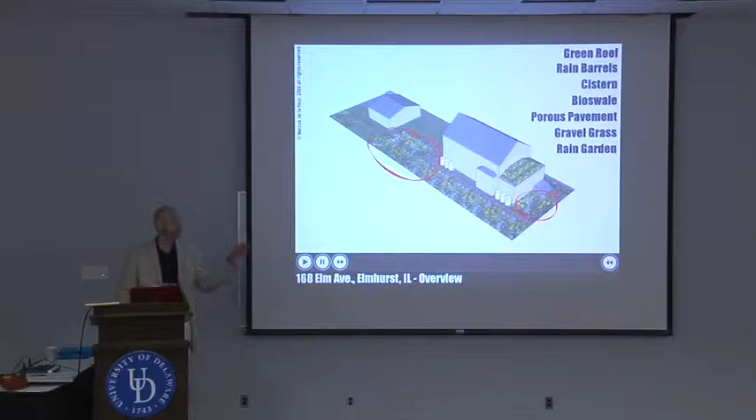So let's start that part of the presentation with the green roof.

And then utopia comes to mind - what if we could have green roofs everywhere? And again, it's really fluid, because is it really utopia? If you look around other parts of the world, you have developments and subdivisions where every square foot of roof is covered by a green roof. So where does utopia start and where does it end?

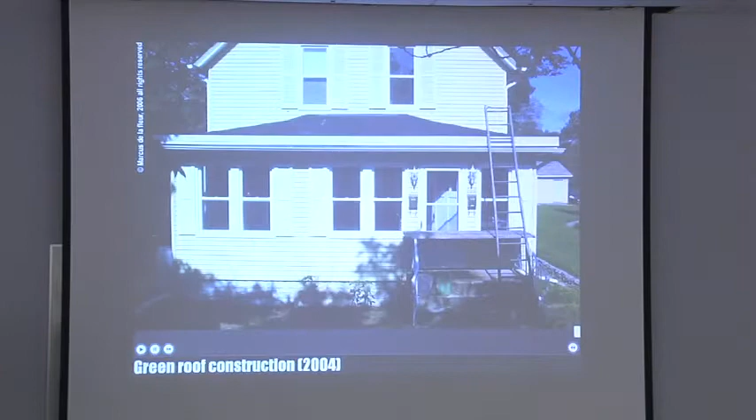In order to understand the green roof a little better, let's look into the guts by looking at the construction, how a green roof is actually put together. We've put a new roofing membrane on there, which is the black stuff, and then you see the white edge along the roof - that's a vertical aluminum edge, perforated to let the water out. Now we can start building up the green roof behind it, starting with a protection membrane. The purpose of the protection membrane is to protect the waterproofing, because the last thing we want is anything damaging the waterproofing.

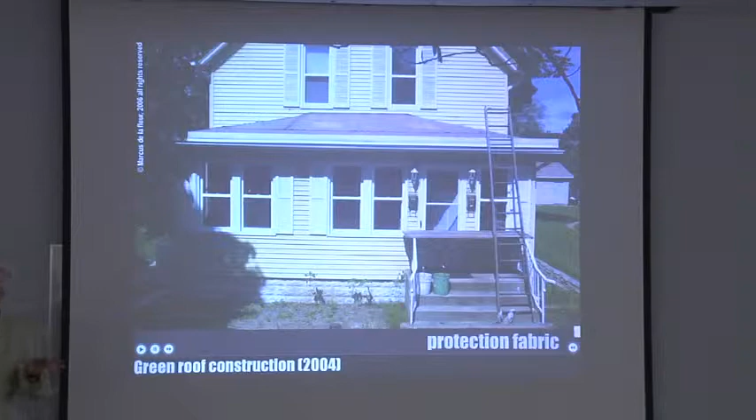Does that make sense? On the protection fabric, we put a drainage layer, which is lightweight, small aggregate, like pea gravel, but significantly lighter than that. The protection fabric really does its work because it keeps those pea gravel elements away from the waterproofing, because you want to make sure the waterproofing lasts for many, many years.

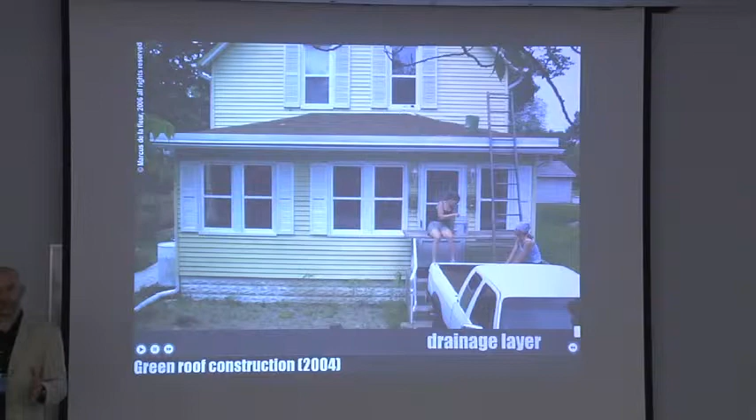The drainage layer is very important because we have to control the water level within the roof. We try to grow plants in a really extreme environment, and to do so, we need to moderate the growing conditions.

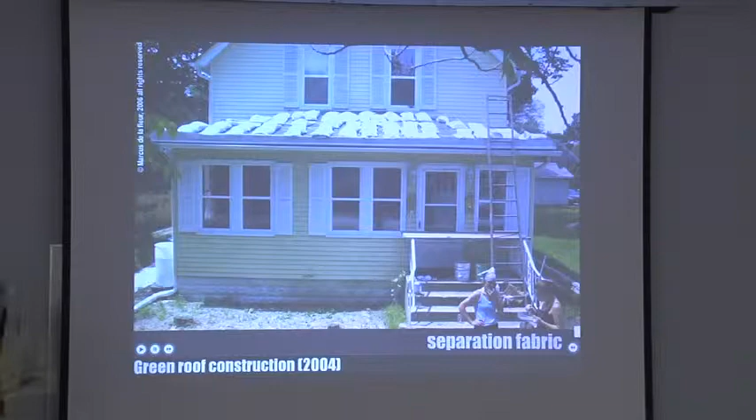So controlling the hydrology with the gravel layer becomes really important. Over the gravel layer, we put a separation fabric that's held down by these soil bags here, or soil medium bags, and then we spread the soil over. The separation fabric is very important because you have the growing medium, which is a very fine medium, and underneath it you have the drainage layer, which is a coarse medium.

The last thing you want is to have the fine medium migrate into the coarse medium, because then the coarse medium doesn't drain anymore, does it? The separation fabric takes care of that.

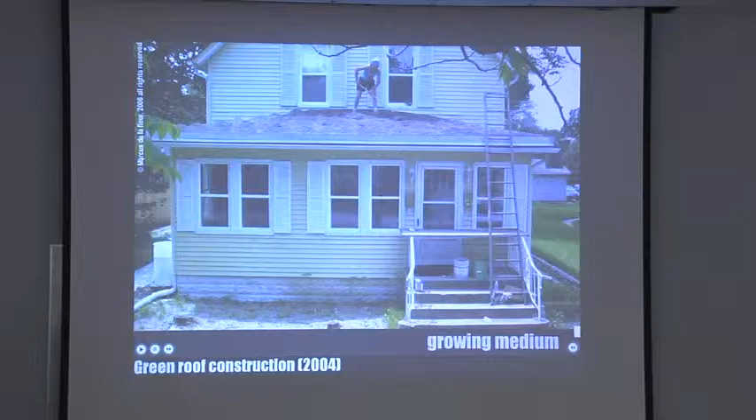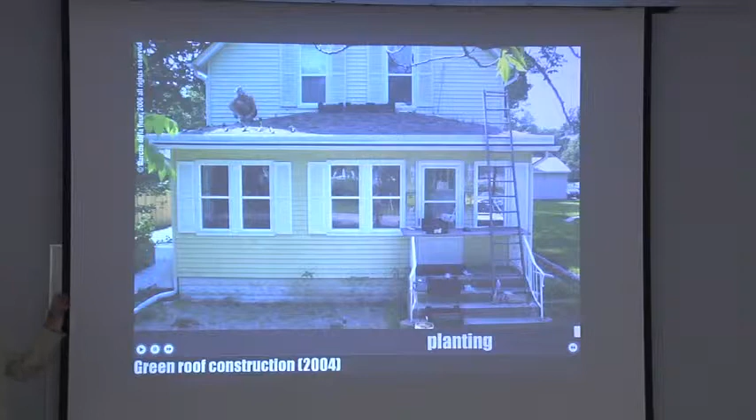We start spreading out everything very carefully to make sure that the weight is distributed evenly. And again, this is where it becomes a bit rocket science. You can't just throw dirt up there, it has to be a growing medium. This has not only to do with weight control, because this growing medium is relatively light, but it also has to do with the growing conditions, which we need to moderate.

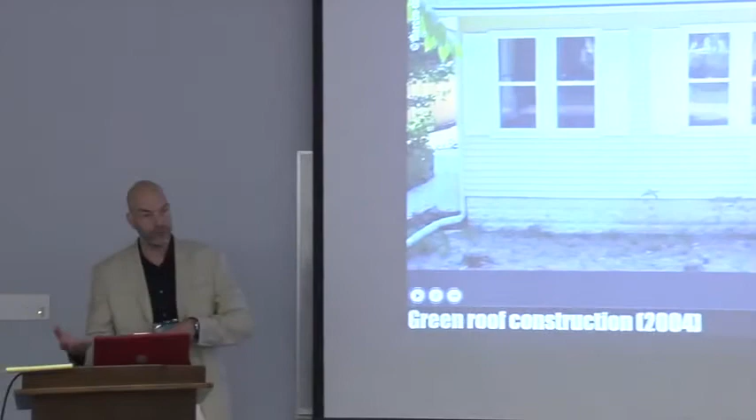So this is specifically engineered to be not too wet, not too dry, somewhere in the middle, so that you can at least have a very narrow plant palette that would survive under these conditions without irrigation.

Where do you think, in this roof, you would have the highest root density? Any guess on that one? Highest root density - you have the plants in there growing right now, you have all these different layers and materials. Where would you find the highest concentration of roots? The top? Bottom? Where on the bottom?

It's really interesting. If you start folding the thing up, the highest density of roots, ironically, is in the protection fabric, which is like a quarter-inch thick fiber mat. That's where all the roots hang out. Why? Because that's the last piece in the whole roof assembly that still will have water. That's the last thing to dry out. So that's where the roots hang out. That's a popular space.

Let's move on. There is always the other issue about green roofs, and that is, how do they look? Just recently I saw on a professional forum a discussion about failing green roofs and this and that, and I suddenly realized it's not about failing green roofs, it's about our definition of what a green roof needs to look like. Because some of the green roofs that were described as failed, they're just doing what they're supposed to do. It's just that the expectation of what the green roof looked like was very far removed from the actual reality, if you know what I mean. And then it gets labeled failed. So explaining what a green roof looks like throughout the season is sort of a utopian task.

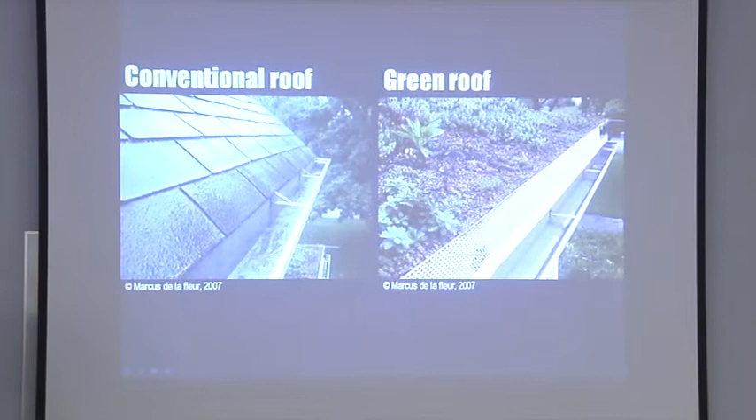There we go. All right, same rain. These two videos are taken seconds apart from each other, and on the conventional roof, you can clearly see how the water shoots off the roof, dumps into the gutter, and then flows toward the downspout.

If I move over to the green roof, if you look really hard, you see raindrops falling into the gutter. But right now, there's nothing draining from the green roof yet into the gutter, because the green roof can still absorb some of this rain and holds it like a sponge.

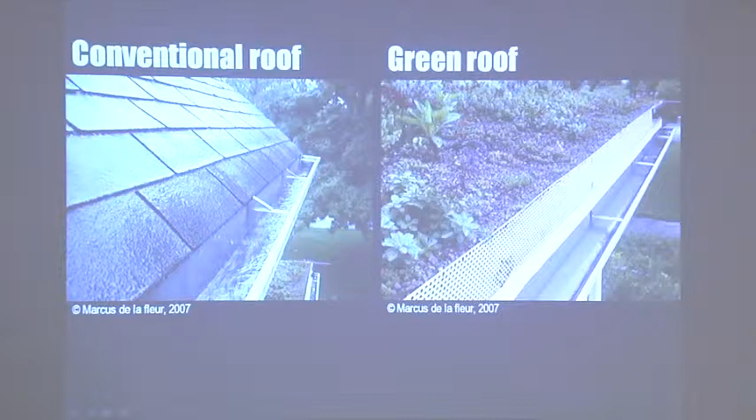Does that make sense? Okay, if you move now down from the gutter to the downspouts, this is the conventional roof, and compare that to the green roof.

Okay, oh, it's running. I thought it wasn't running. Let me start this again.

Hopefully this piece of anecdotal evidence somehow demonstrates what the stormwater management capacity of a very simple green roof can be. And again, no cheating going on here: the same contributing area, same rainstorm, just seconds apart from each other.

So we have a demonstration here on the usefulness of the green roofs and how they work, but we also have a demonstration on what's happening with our conventional roofs, where we have a lot of rainwater coming off. So the question is, what are we going to do with that water? Does it need to go to waste, or can we do something useful with it, or maybe even make it beautiful? The answer is yes, which brings me to the next topic.

I have problems with my flash application here, which are the rain barrels on the south side of the house. So let's take a closer look at those. Excuse my technical difficulties here.

There we go. At the time, this was 2004, we didn't buy rain barrels - for many reasons, we couldn't afford them. At that time, rain barrels were still hugely expensive. The other thing, when I did some research, is that the plumbing provided on the rain barrels didn't make any sense whatsoever, and I'll come to that a little later. So my friend and landlord, Ben, got these soap barrels from the car wash. We rinsed them out, and we started constructing our own rain barrels, a set of 3 pairs.

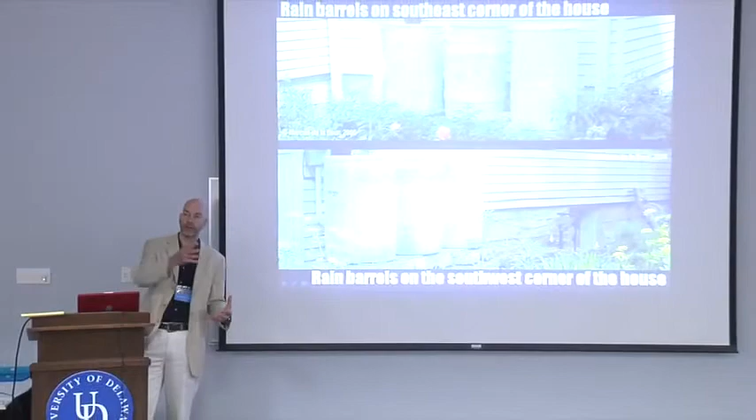I want to look at the upper one a little closer to talk about the rain barrel plumbing and what you have to think about, because rain barrels are sort of the epitome of what can go wrong. People think rain barrels are so sexy, so simple, that they want to put them up, and 3 weeks to 3 months later, they disappear. Because where previously, without the rain barrel, everything was working fine, now with the rain barrel, suddenly things are flooding because we haven't thought things through.

So I'm going to walk you through this a little bit, if I can get this thing to work. Let's see. Okay, first question is, if you have 3 rain barrels, where do you connect them to each other?

There we go. You connect them to each other at the very bottom, not halfway up the middle or on the top - you connect them at the very bottom. Why do you do that? Because you have 3 containers now, but you have 1 storage volume, because if it rains, the rain barrels fill up all at the same time, since they're all connected at the bottom. Does that make sense? This is very important, particularly if you get the rain barrel in one end and need to take the water out the other end.

Next thing is that you must have an overflow, a controlled overflow from the rain barrel. I have a large spigot 2/3 up - once the water reaches there, it overflows into a little paved channel that takes the water around the house into the front rain garden. This is what a lot of people overlook: either the overflow, or if they have one, where does the water go? If you don't address that, then you get flooding - you suddenly have water in your basement where you previously hadn't.

So you have to think those things through. The next thing, or actually a step before that, is you need to think about proportions. It makes no sense to have a big roof and one rain barrel—it rains for 15 seconds and the thing is full. It doesn't make sense to have a small tool shed and six rain barrels, you're going to wait all year for them to fill up. Does that make sense? So think about the proportion.

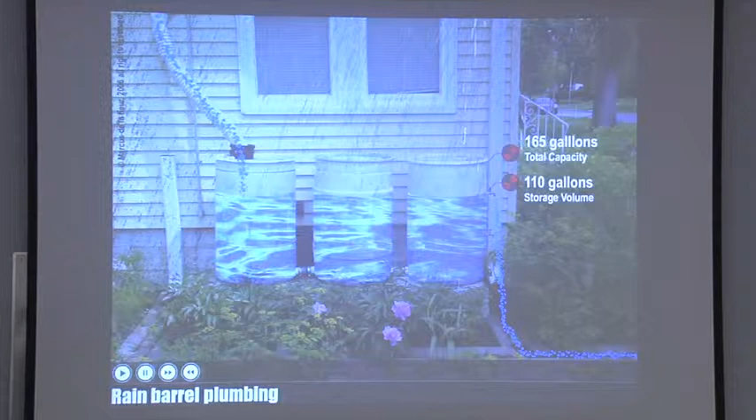Okay, the overflow—once it stops raining, you have that water stored. You can either use it to irrigate your vegetables, or if you have no use for it, then a day or two later you basically let it drain by opening the bottom spigot. It goes around into the front rain garden if we don't have any irrigation needs, which on this project we don't really have because of native plants—I'll come to that one later. And sometimes we had some use for the vegetable garden.

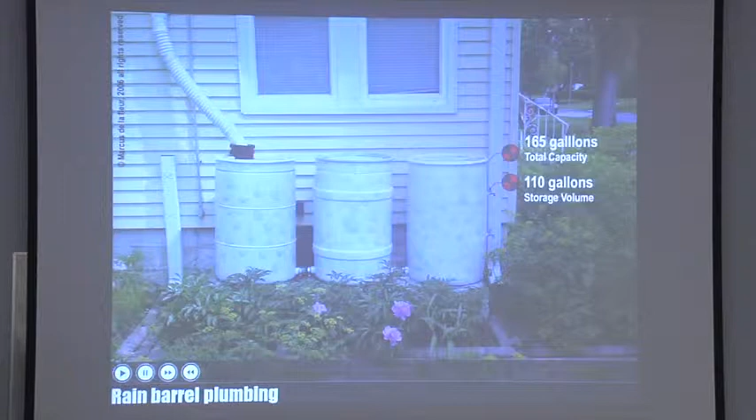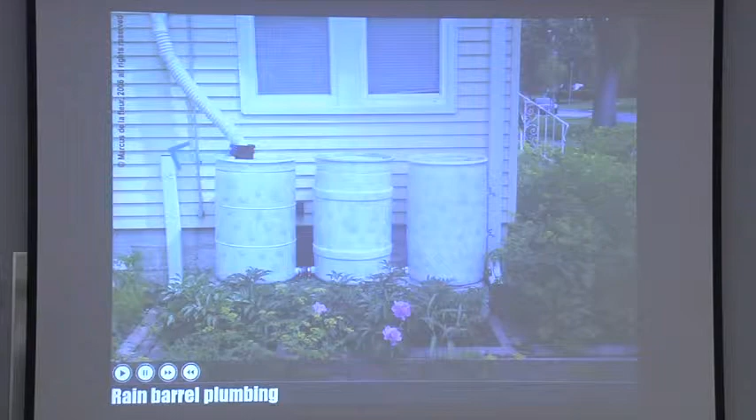And then we are in freezing climates—that includes Delaware here, we are not in the southeast or southwest. So what do you do with rain barrels in the wintertime? There's always a big question. The answer is you leave the bottom spigot open so there's no water in them at all. Then we have this flexible piece that we move over to the rigid piece. So in wintertime, all the water bypasses the rain barrels, comes out the bottom into a paved channel, flows again around the rain barrels into the front rain garden in a controlled way, not haphazard.

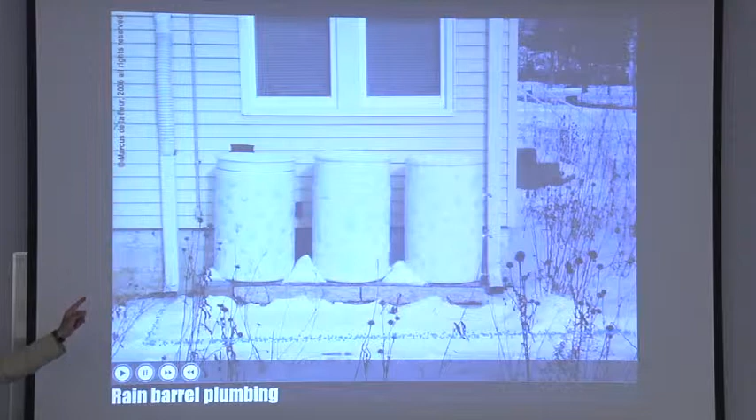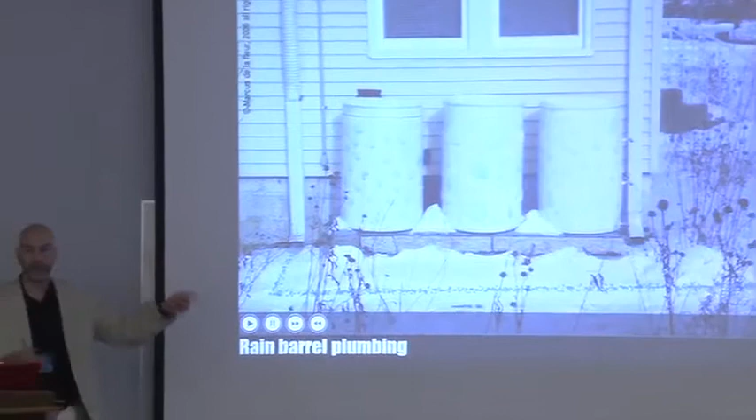Does that make sense? Now I finally figured out, if you look at these rain barrels you buy, you hardly ever can open the bottom spigot and let them all drain out. Why? Because there is no bottom spigot—it's always somewhere up, usually a third of the way. And then finally it occurred to me why that is.

So you can put your watering can or watering bucket underneath it. Now there's a very simple solution to that too: just put your rain barrels on a little pedestal, and then you can have the spigot at the very bottom. You can get the water into the bucket or rain barrel. Does that make sense? So something just about thinking these things through.

Okay, next subject: we talked about the green roof. Precipitation hits the roof first, so we thought through what we're going to do in the front, and the south-facing roof, which goes into the rain barrels. Now the north-facing roof—what we're doing here is we take all that runoff and channel it into an underground cistern, where again we harvest it and store it for later reuse, if we only had something to use it for in this particular case.

Sometimes I just gave it to my neighbors when they were ready to water their lawn. I said, I have water in my cistern, do you want to use it? Here is the cistern—it's sort of hard to see because everything is underground, so hopefully this little photo montage explains what's going on.

There's a 1,200-gallon storage tank underground, the lid on top. The beauty of the cistern is that it provides year-round storage—it takes advantage of the wet season in fall and winter and spring, because this thing doesn't freeze up, it has a thermal mass around it, which is Mother Earth. You can store most of the water from fall, winter, and spring in there, and have it ready for use during the hot summer months. Does that make sense? With the rain barrels, you solve at a much shorter time cycle—the cistern, you really can think seasonal.

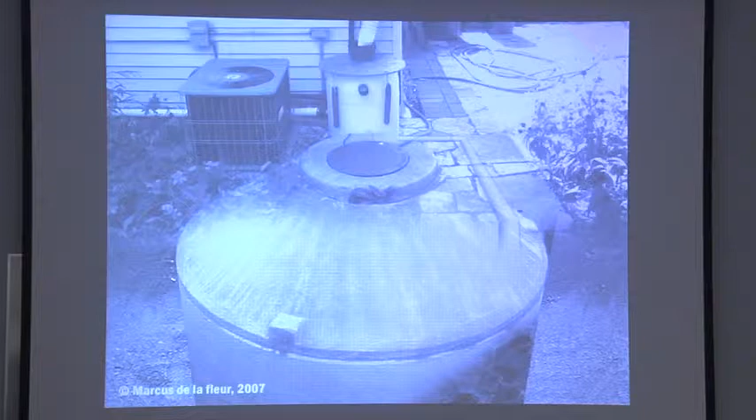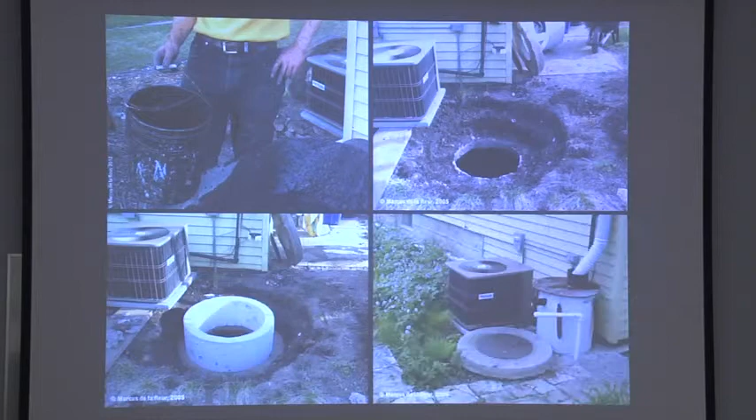Now, in our case, we had to do quite a bit of repair work to get the thing done. We first had to clean all the muck out, because it had been sitting there doing nothing for 70 years or so, put a new riser on, and then we were ready to go and happy to go.

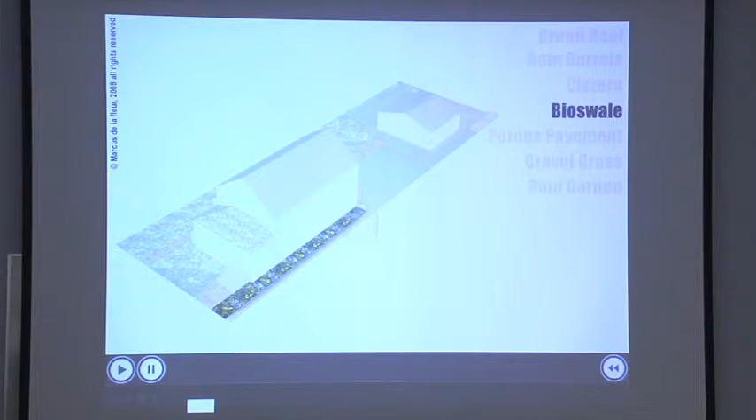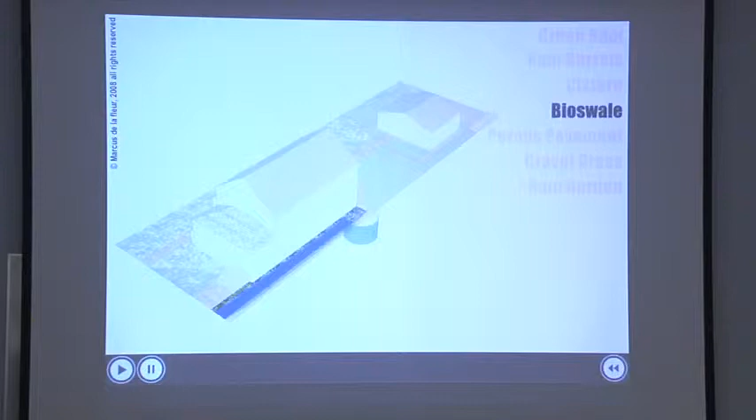Moving on from the cistern—oh yes, everything needs an overflow. We talked about the overflow with the rain barrels. What happens if the cistern is full? It needs an overflow too, and the overflow of the cistern goes into the adjacent bioswale, and that's the thing I want to talk about next.

Let's see if we can move on. There we go.

It's a large garden spigot, and yes, you do want to have a diameter that matches what comes in to what comes out, because that spigot was 2/3 up. I had what I called 1/3 bounce volume, so that allowed, if the water came in faster than it went out, it could use that extra storage volume, and it sort of largely worked out. But the preference would be, in general, the size coming in should be the overflow size going out. You're correct, thanks for pointing that out.

This is the north side of the house. This is about the property line, so we had 7 feet there. We had to think this through a little bit, because you want to be very careful about introducing water this close to the house. This is an old house with an old basement. And don't get me wrong, I like swimming pools, but I like them on my own terms.

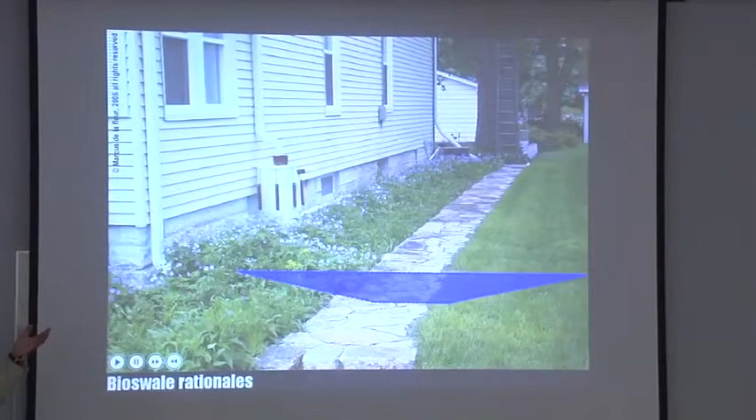So we thought this very carefully through. Let me use this diagram to walk you through that. If you take a cross-section of a typical swale, it didn't work out, because there's a property line, we didn't have that room. The idea came, what about if we clip, say, 2/3 of the swale off? We end up with this, which is good because now we are within the property line, and also the low point is the point farthest away from the foundation, if that makes any sense. So if I cut...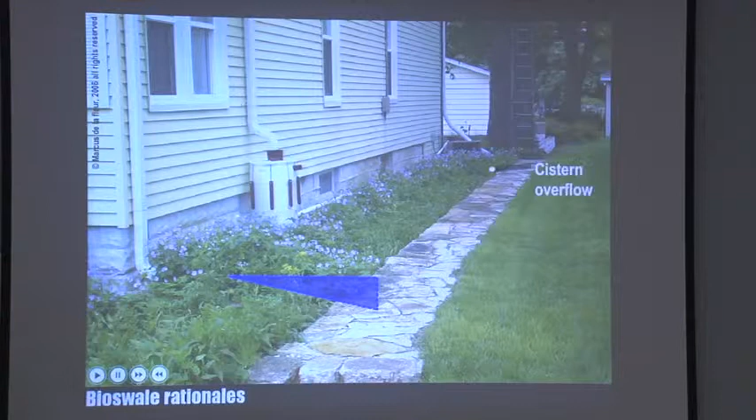Everything away, if it starts raining and the cistern is full and starts overflowing, the bioswale can fill up to what we call a high water level. The water can't get any higher than this, because there would be an overflow out of the bioswale at this end. The whole point is that I give the water residence time so it can infiltrate into the ground, because usually the ground is the bottleneck. What happens in many instances is the water comes out of the sky faster than it actually can go into the ground. By giving it residence time, I can make up for that deficiency and make sure all the water that falls out of the sky can infiltrate into the ground.

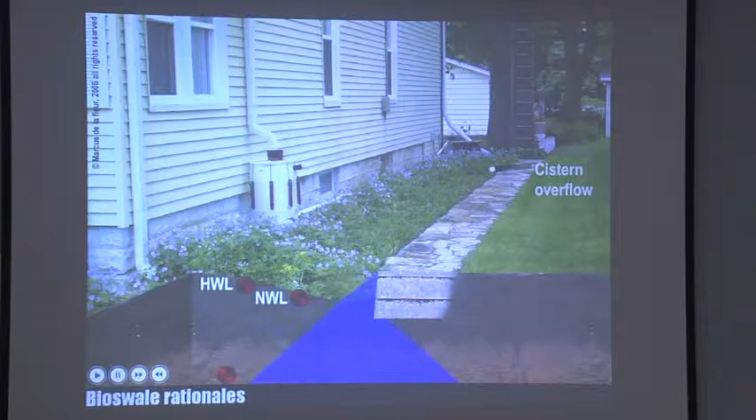It does its job, then I have normal water level. What usually happens in most rains is that I barely get any water in at all, because there's capacity in the cistern or it didn't rain that much. So high water level we actually never saw. Normal water level possibly neither, but it's hard to tell because the vegetation is hiding it. This is what typically is happening, and so it kept us safe with the basement and avoided an unintentional swimming pool. It has worked fine in this case, but I would caution everybody to be very careful about introducing water this close to the house.

Let me see what's next.

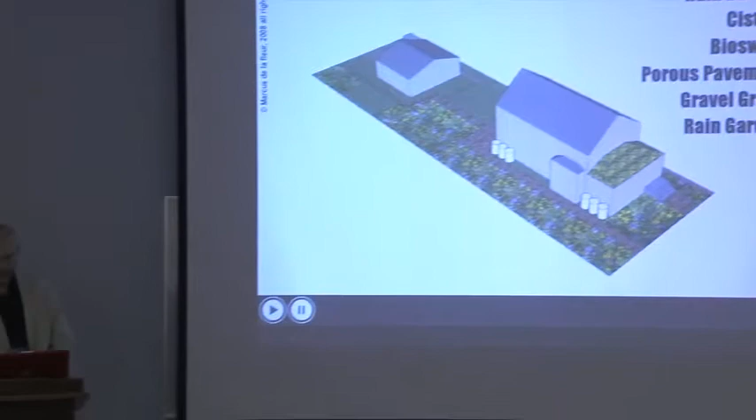Porous pavement, let's look at that part. Now, before there's porous pavement, there's the subject of dealing with the old pavement, which was your typical concrete. So we took that all up, and we sort of had an unwritten zero waste policy on this whole project. Rather than throwing all that old concrete walk into the truck and bringing it to the dump, the question is, what are we going to do with that? The small pieces we use in the aggregate base for the porous pavement.

And then the large pieces, do you recognize where they went? We were actually able, by breaking the concrete walk up into relatively regular pieces, to reuse those pieces entirely. In Chicago, we have the term called urbanite, not limestone, but urbanite. So we use those as you would use limestone to create little retaining walls and curbs and stuff like that. It's one of those interesting dilemmas: if you try to be more responsible with waste management and more innovative about reusing and recycling, but then you have projects under contract, how can we reconcile this innovative use with the rigidity of the contracting world?

This can work in a design-build environment where you rip something out in one project and think, oh, I have this other project, I can reuse it there. But if, let's say, Newark puts out something to bid, how do you want to bid this? Because where do you know that you get this stuff from? How do you know about the availability? I would like to think that one day we can solve this challenge, but right now it's really hard to get into the innovative salvaging and reuse on contract work.

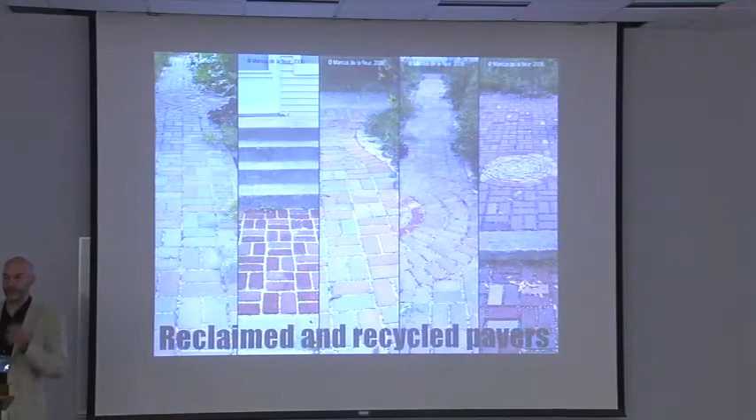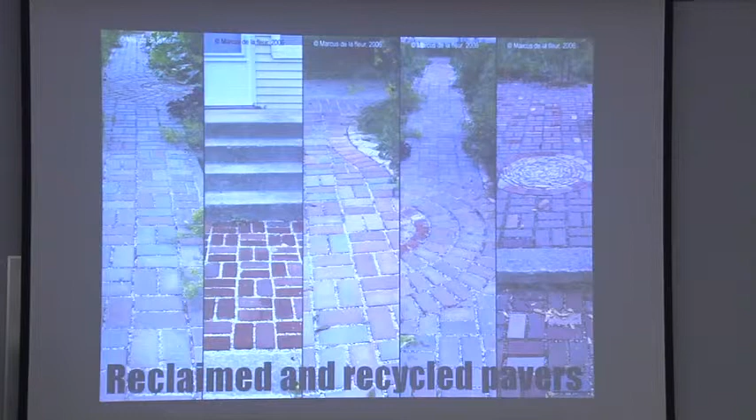Or you can do what we did, basically creating our own porous pavement system by salvaging and reusing used pavers, basically brick pavers and Holland stone pavers, to build our own porous pavement system out of them. Because we wanted a shoestring budget, we couldn't buy any of the pavers. We were just going around and collecting them from people that had some left over or were ripping the driveway out. And we said, yeah, we gladly take that, thank you.

How does porous pavement work? We surely know how our regular pavement works, which drains very poorly in most cases. But if you look over to the porous pavement, you'll be hard-pressed to find any ponding water at all. It basically infiltrates right into the system. To understand what's going on there, we are best off looking at the system.

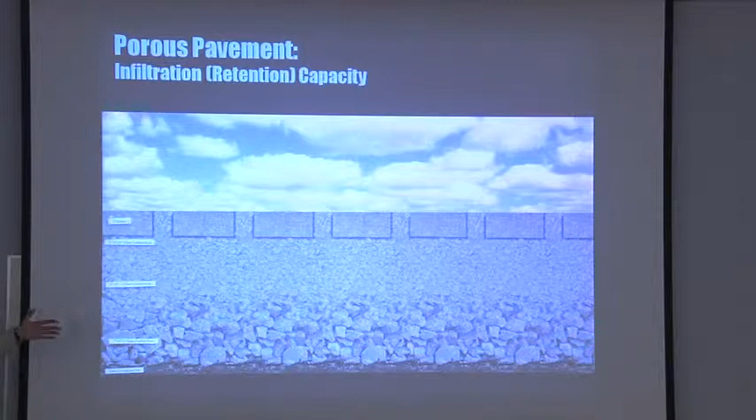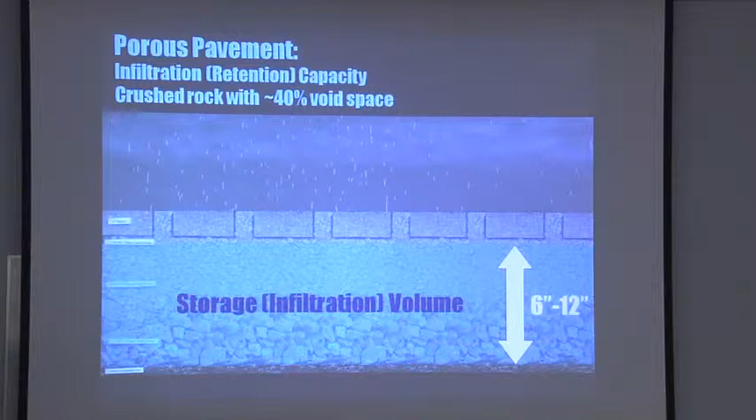The key is that we have the base composed of crushed aggregate, which is open-graded aggregate. So you have no fines in here, and you end up with a porosity between the stone of up to 40%. That's what starts holding the water, and that's also what allows the rain, when it falls onto the pavement, to fall right through and into it. Then it fills up the voids, and that's where we get the water storage. This is very important because we have the soil that is the bottleneck, and the water may come out of the sky faster than it can infiltrate into the ground.

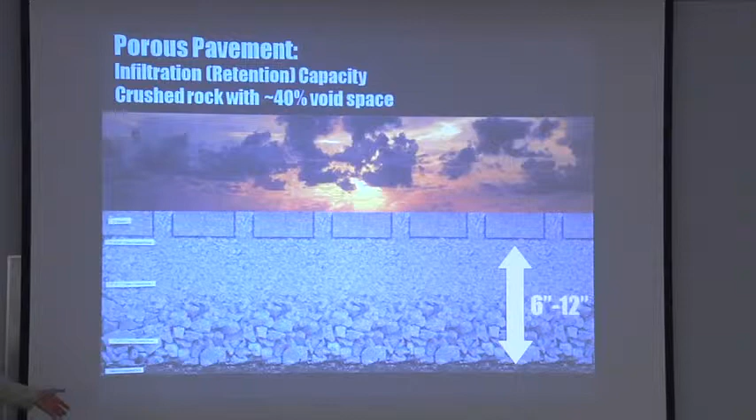So by giving it residence time here, the porous pavement does what it's supposed to do. It's slowly infiltrating it back into the ground without getting any runoff at all, unless you have a really bad rain event. Does that make sense? It's about giving the water, the runoff, residence time in the system to let it slowly infiltrate into the ground.

So it's a refreshing season if I look at this in June. There's always a question about what do you do with porous pavement when it snows. For some reason, porous pavement must be very different than any other pavement, and I get a lot of people completely hung up about how they use porous pavement in the winter. I don't know if winter is such a big deal in Delaware, but in the Midwest it always is a really big deal.

So what do you do when it snows? Have you seen my presentation before? Then you have good common sense. Indeed, you do shovel it. I have this video in there because people don't believe me. For some reason people have the opinion you can't clear snow off porous pavement. You can do it, fine.

Okay, that gives us the next thing. And I get the question, what about the ice? It may melt faster because you have more material that's holding more.

Well, you actually go even a step beyond that. In order to have ice, you need to have standing water, right? So this, at the time, was on my walk to the office, from the pilot project to the office, and it got warm overnight. Then the next day it is freezing again, and you can ice skate to work. I call it my ice ballet.

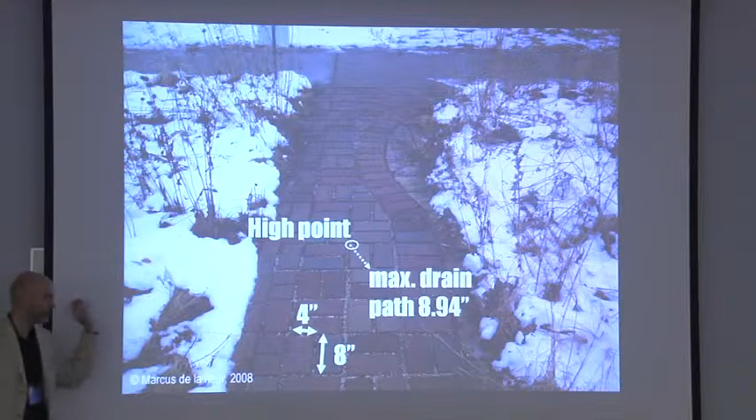Disclaimer here, if you have a downspout that discharges onto the porous pavement, you will get ice, because now you have such a big volume that you get ice built up. So it's not like it never will have ice, but under normal conditions, you will not have ice on porous pavement.

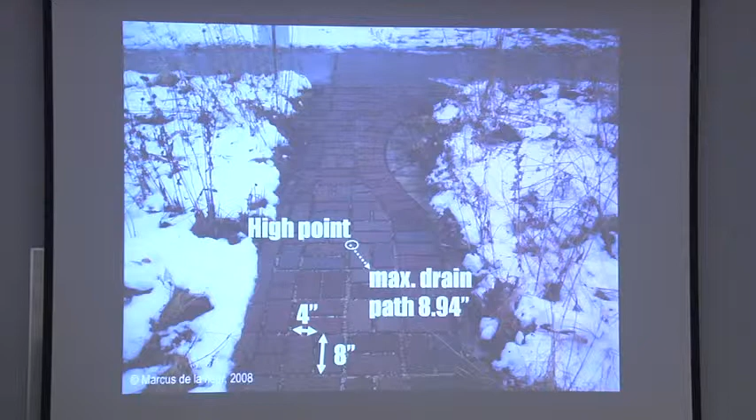Weeds growing through the cracks. Don't you love that? They make it green.

That's where it comes to the one utopia versus the other again. You will get stuff germinating in the porous pavement. If it's used for driving, you will get very little because the traffic basically keeps it out. And then it's just a matter of whether it fits in or not. In our case, we never really had a problem with it. And if it gets to the point where it gets tall enough, then it's easy to pull. So once a month, I pull the big stuff out. And sometimes when it gets really hot and dry, that takes care of it too.

Do the bricks move with freezing and thawing? No, they don't. The reason why is if you look at one brick paver with the crushed aggregate underneath it, that's almost like built like a road, because you want to have all the crushed aggregate to store the water. So you literally can drive a truck over that stuff. It's built that strongly with all that aggregate. You see what I'm saying?

If you think about typical paths built in residential applications, they scoop up some soil, put some sand down, put the pavers down. And 2 years later, you can do surfing on that stuff but not walking. It's because there's no structure underneath it that keeps it in place. With porous pavement, if you install it properly to store and infiltrate the water, you don't have the issues of frost heave and all that stuff, because it's built so strong, it's literally like a road base.

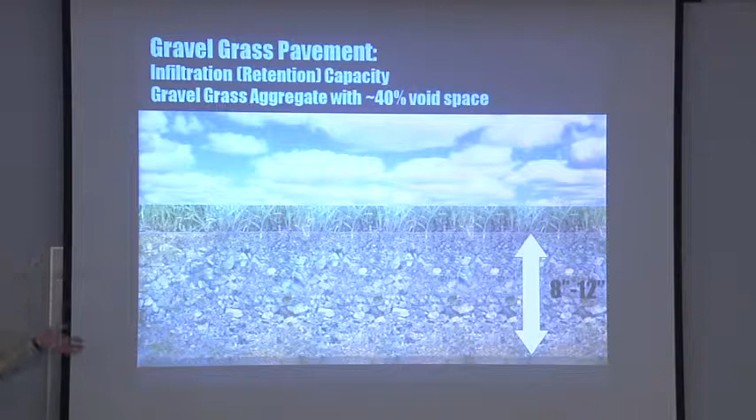It works the same way as the regular porous pavement. You have your crushed aggregate with the 40% void space and the same depth, so that when precipitation falls on it, you can store the water in there, and give it the residence time to infiltrate back into the ground.

So what this gravel grass pavement provides is the structural capacity to take car traffic on it, and the horticultural capacity to have those drought-tolerant grasses growing in it too.

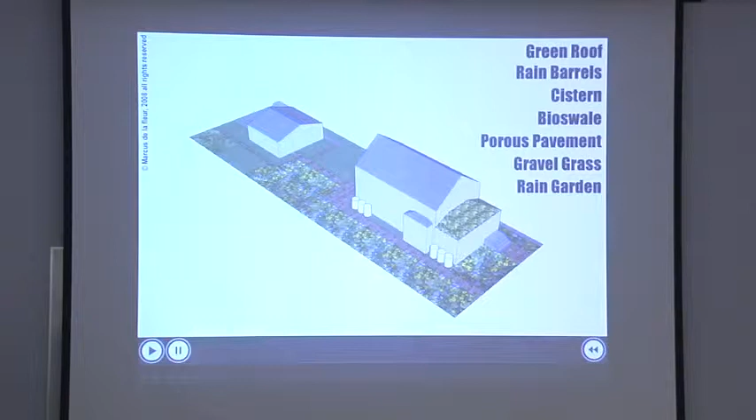Moving on from that, I think we have one item left: the rain gardens, yes, it's my favorite topic.

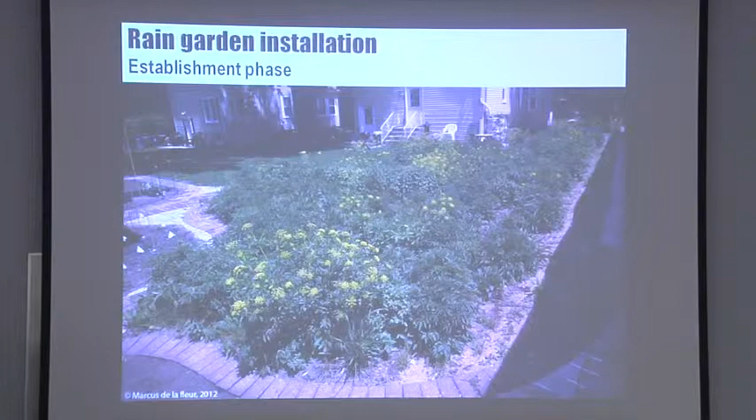This is the time where you really want to stay on top of looking at the ecological niches, so you don't get volunteer species in there that you don't want. You get through a really interesting succession of plants. It never looks the same any given year, every year has different environmental, climatic, or water conditions, so something else is popping up. Once fully established, we go back to the question of what does it look like?

Now, keep in mind this was all established from seeds and seeds only. So the only control I had was the species I picked to be represented in there, but I had no control over where they would grow, because they germinate where the conditions are right. If you want more control and have a lot more money, you can buy plugs and plant them where you want them and seed in between. And if that's still not good enough, you can spend even more money and have 100% control by planting it all with plugs, deciding where they grow. Now the problem is these little buggers have the tendency to flower and then seed, so if you really want control, you have to put the maintenance in to keep it in the shape you want.

Which brings me to this other interesting topic about using native plants.

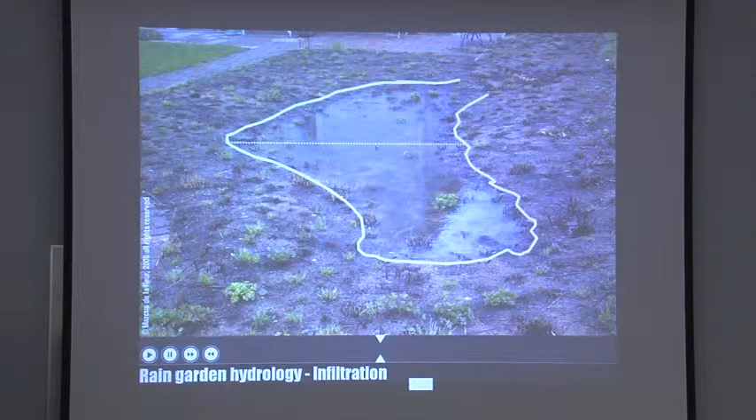The rain garden is doing what it's supposed to do. It infiltrates those 4 inches. I had 4 inches of water that I could put in the rain garden, so it wasn't even full.

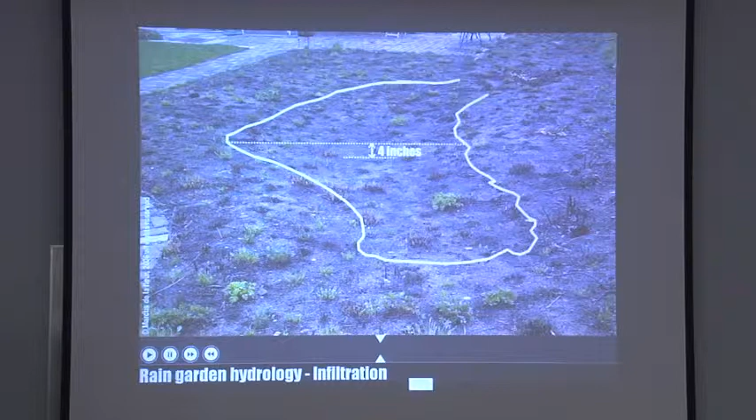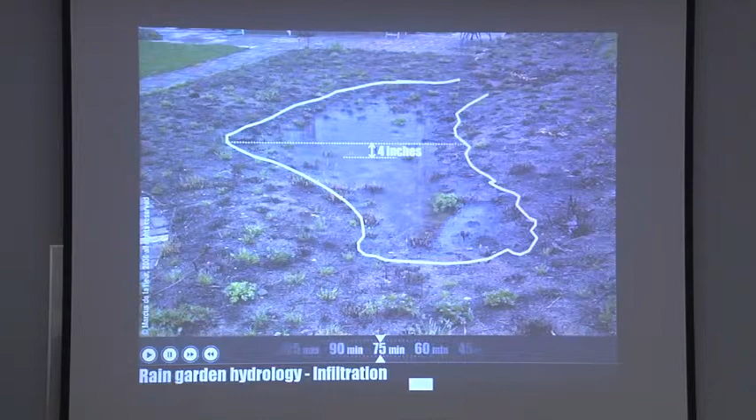So how long do you think it took those 4 inches to infiltrate? Any guess? Clay? Midwestern glacial till? It's 2 hours. Here's a spoiler: it is indeed 2 hours. So if you do the math right now, you're talking about 2 inches per hour of infiltration on clay soils.

If I tell my engineering colleagues that, they think I'm going crazy. For them, clay means nothing in terms of infiltration, you can't infiltrate into clay. But the interesting thing is, you have clay, and then you go to your county soil surveys, and you have clay, and you have everything in between. So you have clays that put water away like there's no tomorrow, and then you have other clays that you could literally use to build a swimming pool.

So when you hear clay, don't automatically assume you can't do anything. Is there anything magic about my soils? No. I have the typical glacial till with a dark topsoil layer, and then the clay underneath it.

So I wanted to know what else is going on, so we did some infiltration testing there, and the results were really interesting. A third of an inch in the back where the gravel grass is. In the rain garden, the 2 inches I indicated earlier, the porous pavement, a little bit more than 2 inches. On the side of the house, there was 1 inch. In the front, a little bit more than 1 inch. On the bioswale on the other side, again we're at 2 inches and something.

Now, if you start thinking about this, it suddenly starts making sense, because the low infiltration rates are always where there was soil disturbance. The porch at the house, for instance, was added on later. We found construction debris while building the rain garden in the front, so that's where we have low infiltration rates. The very back where the gravel grass is, possibly a truck always pulled in and out to unload material, so that's why you possibly have a really low infiltration rate there. The other areas that were non-disturbed have the high infiltration rates. So it gets us back to the idea that there is a magic, if you will, and that magic is that my soils really have never been exposed to something like this.

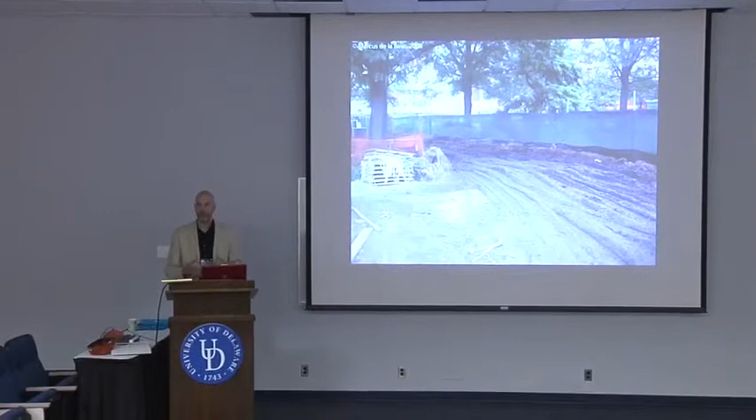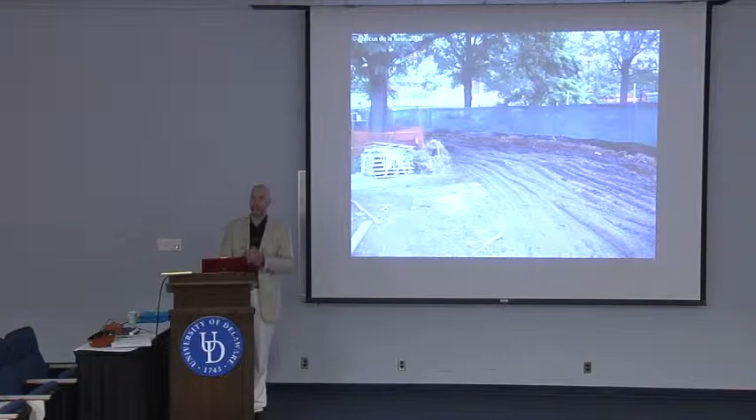Or that, if I get it to work. Now, it takes a couple of hours to wreck the soil. It will take years upon years upon years to restore it to its previous capacity, if that's even possible. So the one thing to think about in terms of sustainability is, how do we treat your soils? If you want to do sustainable stormwater management, you really have to be very careful about what's going on in your soils, how you treat them, how you protect them.

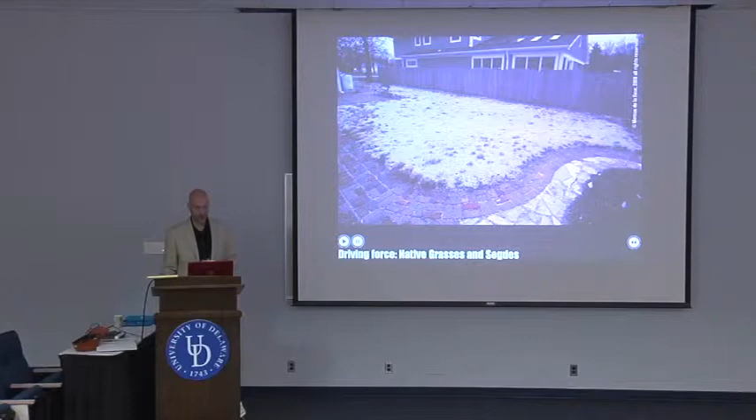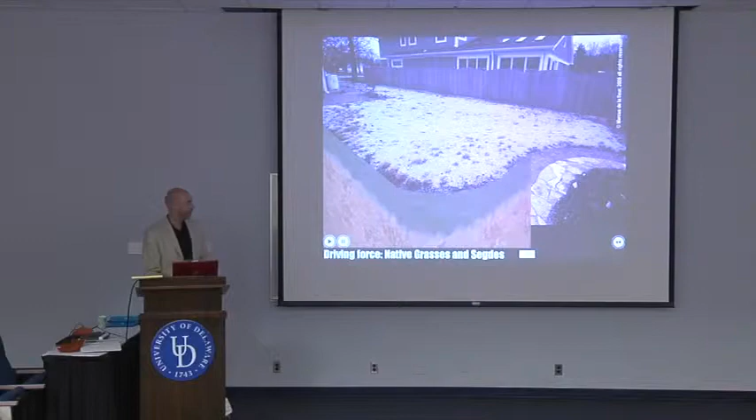There's another aspect to this, the soils, which has to do with the native vegetation again. So if I do a cutout, the trick or the beauty with native vegetation is that you have the above ground biomass and the below ground biomass. The below ground biomass is 2/3 compared to the above ground biomass, so science tells us. So each year you get this massive root structure into the ground, produced by the grasses and sedges mostly, the forbs contribute relatively little. It's almost like deep mulching, because a third of this below ground biomass dies off every year. It's almost like you take a needle, stick it in the ground, and trickle compost in there.

So what happens here is you have clay soils tightly packed together, and over the decades, the roots come in and start pushing those clay particles apart, providing avenues for the stormwater, or for water generally, to infiltrate into the ground. So that is what creates a sponge at the end.

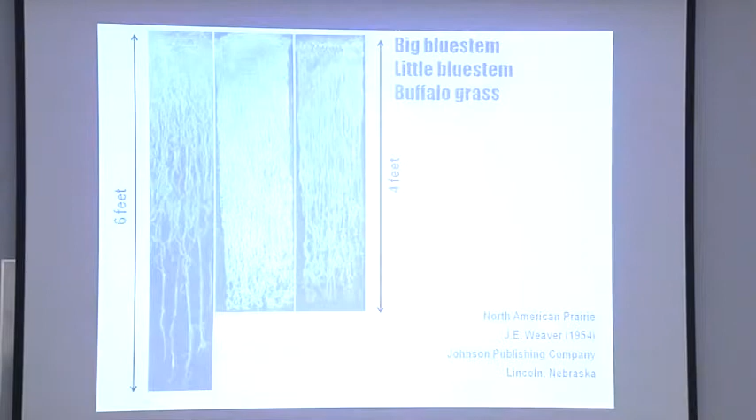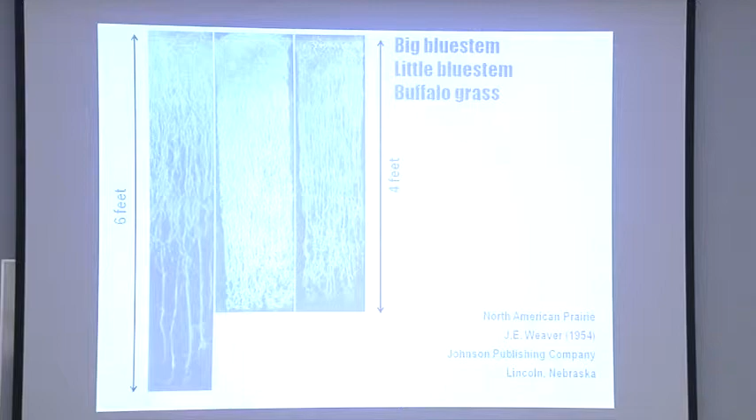And I'm not making this up. There was science early in the century by Weaver in the 30s in Nebraska. He actually, in a very meticulous way, started to excavate some of these grasses and sedges and document their actual root mass and root depth.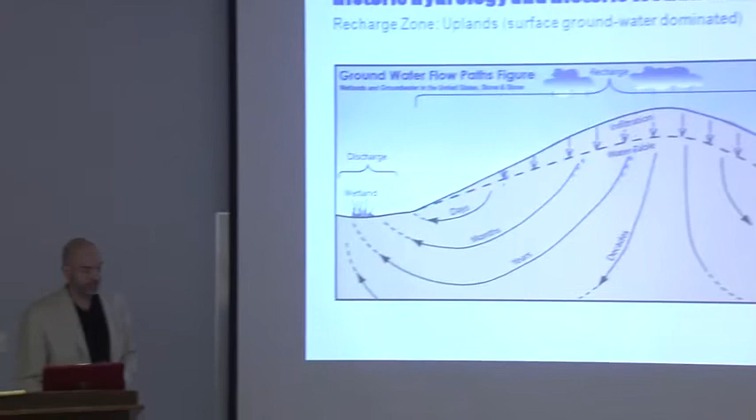So if you look at the science, it's actually based on some really interesting research, which gets me to the pre-settlement or prehistoric hydrology, which was really powered by the prairie landscape, or if you will, by the grasses and sedges. Because what happened in the prehistoric landscape is that when water fell onto the ground, when it rained, the water went into the ground. There was hardly any surface runoff happening. It was mostly infiltration into the ground, because you had this big old sponge, which is called the black gold, which were the prairie soils.

The water moves through the geology at different time scales, from days to weeks to decades. So it goes into the ground in the uplands, and it comes out of the ground in the lowlands, which are the wetlands, the rivers, the lakes, you name it.

Because you have this infinite reservoir in the geology, in the lowlands, you basically get a flow coming out of the ground that's constant, clean, and it's constant year-round, and it also comes out at a constant water temperature. There are a couple places, or one place in the larger Chicago area that I know where this still works, which is Bluff Spring Fen in Elgin, Illinois.

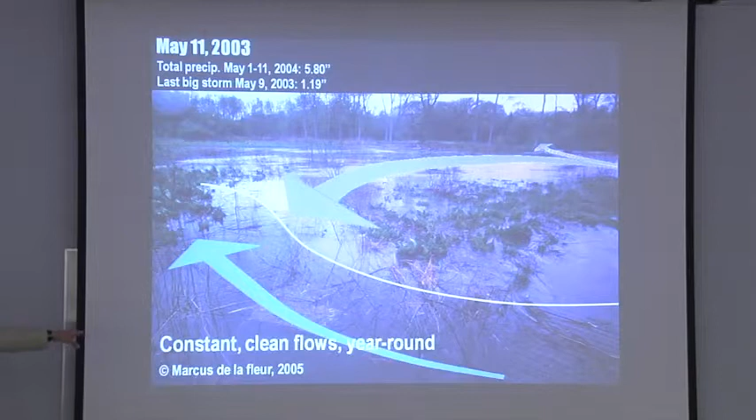So what we have on one side is, in the background, a typical suburban stream, which is Willow Creek I believe. With the typical suburban stormwater management, the stream gets overwhelmed, so all that stuff starts pushing into the Bluff Spring Fen watershed. On the other side, you have the clean water coming from the fen, pushing up against this wall of water. It's like a dam of dirty water. So on one side, you have constant clean flow year-round, it still functions. On the other side, you have anything but constant or clean. Does that make sense?

So on one side, we have that functioning hydrology largely powered by the root system of the native sedges and bunch grasses. On the other side, we have a system powered by another grass, Kentucky bluegrass, which is not native. What we have to think about is that the above-ground biomass is proportional to the below-ground biomass, so that's all you get. And all of that is really not contributing anything to the infiltration capacity or to the health of our soils.

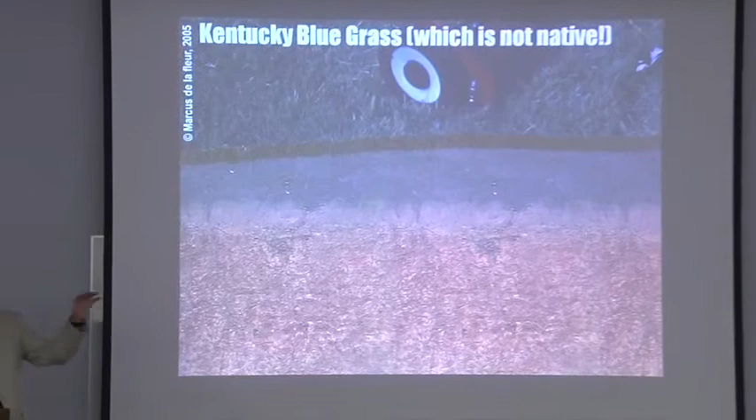And it's not just Kentucky bluegrass. I single this one out, but it's how we treat and develop the land. The interesting thing is, this grass is hard to keep alive. If you think about it, that little bit of above-ground biomass with that little bit of below-ground biomass - we have a whole industry built around just that deficiency. If you think about it, it's really crazy. Anyhow, we found that stuff all the way around us.

What happened here is we turned that historic hydrology on its head, where previously we infiltrated in the upland, now we discharge. And where previously water was discharged in the lowlands, we now expect it to infiltrate. So it's a 180-degree reversal. With that, it's hard to expect any good results when it comes to stormwater management or flood treatment. That stuff, as I said, is going on everywhere around us, certainly all the way around where the pilot project was.

So I want to go from the big picture back to the pilot project itself and look at some metrics. How are we doing on time? You're fine, good.

So if I look at the project prior to any improvements, I looked at the 2-month recurring rain event, that's 1.38 inches in 24 hours. I started adding all the volumes up from that particular rainfall and ended up with a total of 980 gallons of runoff that the property produced.

Numbers are interesting, but what does it mean? Let me go back one. There we go. So 980 gallons equals 18 rain barrels. That much runoff was produced by a relatively normal rain that you'd expect to happen 6 times a year. Now this is pretty significant in a certain way. Do you know how?

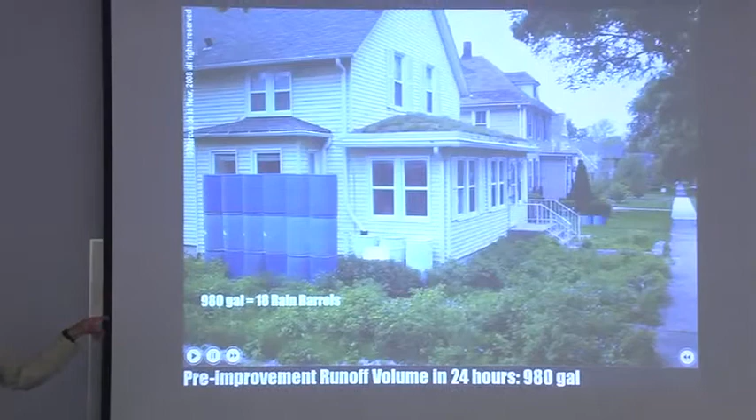So under any given normal rain, that's the runoff that property produced before any improvements. Think about it, I'm not the only kid on the block, or the neighborhood, or town. So this was sort of the default landscape, and everybody else produced that same thing.

Naomi was asking an interesting question at the dark conclusion of her speech this morning, like what can we as humble individuals do about this big problem? Think about the problem you actually produce on your property, and maybe start thinking that way.

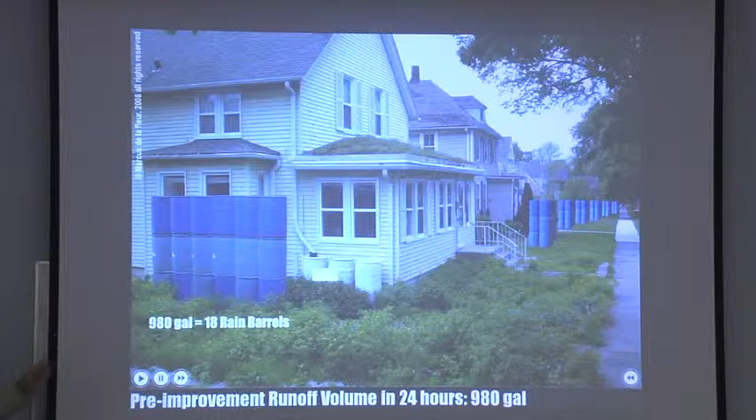Native plants are not used or don't tolerate those rapid fluctuating conditions, so they basically pack up and leave. What you're left with is erosion, and those species you don't really want to have in there. Because we interrupted the base flow where water feeds into the streams, if it doesn't rain, you have extremely low water levels. The moment it does rain, it's right up full to the bank because everybody dumps their stuff right in there, and so you get this rapid up and down with each rain cycle.

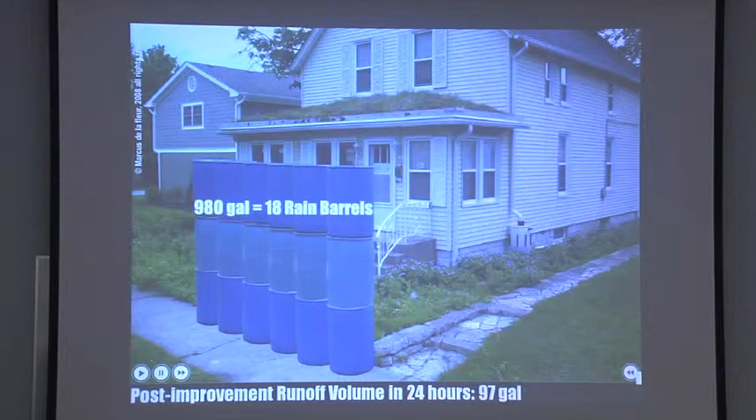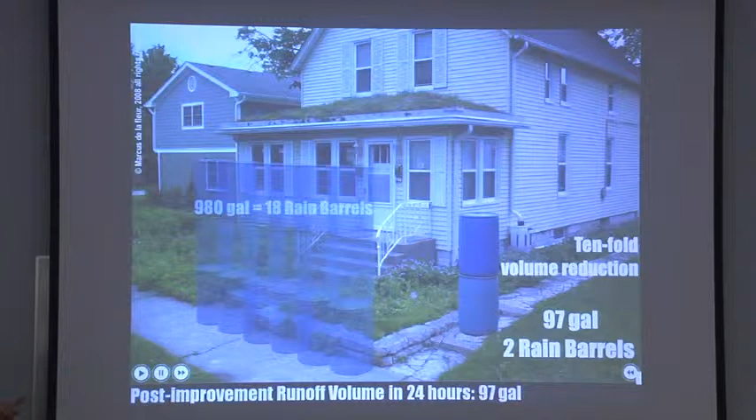Let's look at the property after the improvements. Did the same calculations, this time taking all the improvements in storage volume into account. So we end up with a total of 97 gallons compared to the 980 gallons. If you put this visually again - there we go - I previously had my 18 rain barrels, now I'm actually down to 2 rain barrels, 97 gallons. That's a 10-fold reduction just by doing these improvements on the property. It's a 10-fold reduction in runoff volume. I'm not talking about rain, I'm talking about the actual amount of water leaving the property.

Let me throw some other numbers at you. In engineering terms, I took this really small storm, the 2-month recurring storm, which should happen 6 times a year, so I don't blow anybody's mind. But in engineering terms, we typically talk about the 2, 10, or 100-year event. Even on those events, I can retain 94%, 87%, or 70% of the runoff on the property. So really good results - tells me the engineering model is working.

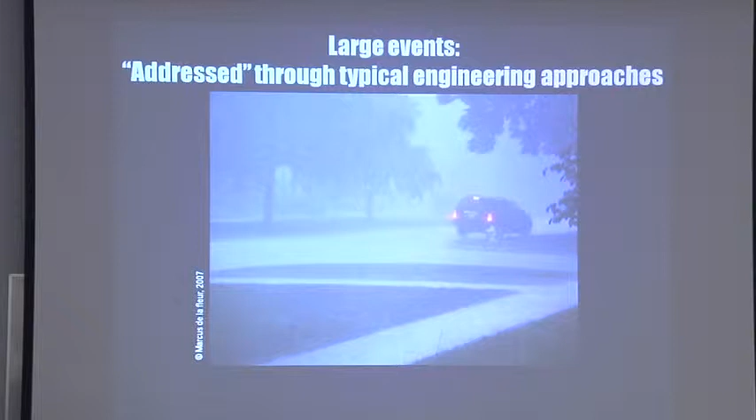The large rain events we get are usually addressed with the good old-fashioned civil engineering approaches and flood management approaches, so usually we do a relatively good job there. In terms of inundating the ecosystem once in a while with all the runoff, like in terms of years, that doesn't necessarily harm the ecosystem that much. It becomes a problem if it happens frequently, like every other week. So I would put the large storm under 'we dealt with that.' I can't say the same thing for the small storms, because right now all the water runoff from the small storms also ends up in the ecosystem - in my case, Salt Creek. Every time it rains, whoosh, the water goes all the way up, and it goes all the way down.

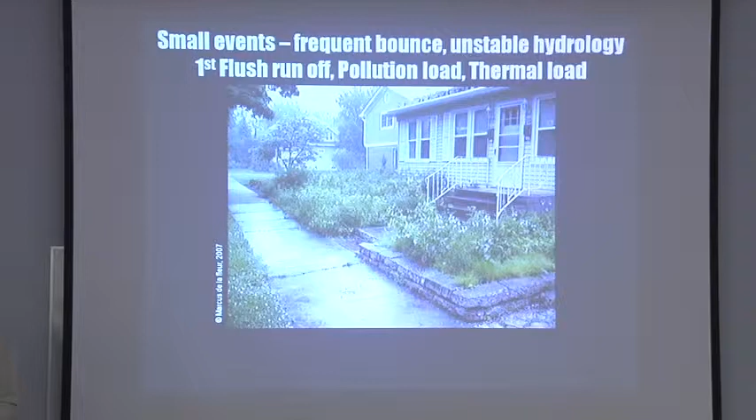With that comes all the pollution, the thermal load, the first flush runoff, and that really is contributing to the ecosystem damage and loss of biodiversity we have in our natural landscape, streams and wetlands. So that's why I'm really concerned about the small storms. We need to stop them from ever reaching those ecosystems. We have to infiltrate those on our properties. If every second year something ends up in the ecosystem, it can probably manage that. But if it's every other rain, it can't take it.